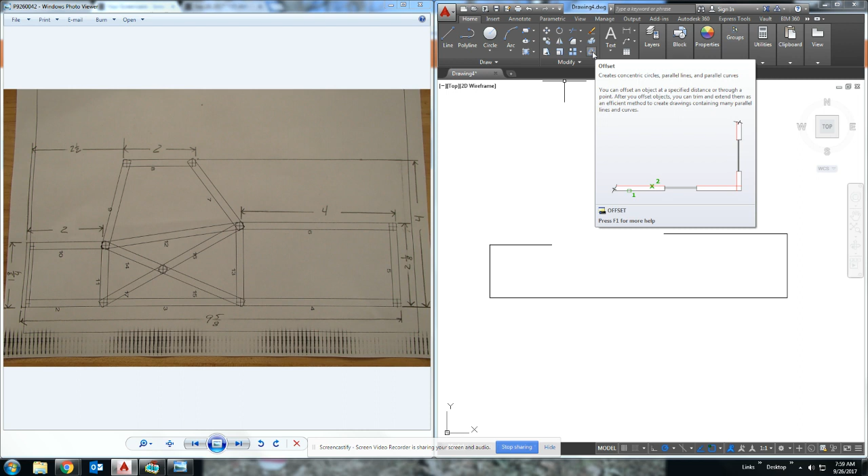The way this tool works is if you click on the button and open it up, you'll notice near my cursor in the white screen it says 'specify offset distance.' So it wants to know how far I want to offset. The first thing you do after clicking the button is type in the distance. Since my car is 4 inches tall, I'm going to type 4 and hit enter.

Now it says select object. I'm going to click my baseline and go vertically by 4 inches. So now I have the bottom of my car, and technically this is the top. Obviously this line is too long, so I'll have to trim it and clean it up in a bit, but right now it gave me the bottom and the top of my car.

So now I want to also find this point right here. I know that it's 4 inches up and 2.5 inches in. So what I can do is draw a line here, and then offset this line 2.5 inches in - offset 2.5, enter, and I can offset in.

So right now that intersection there is this point right here, which is really helpful because now all I got to do is use the line tool. I can click on this endpoint and click to that point there, and now I have just created this line right here. And this is going to start to be the top of my car.

Now, since this line doesn't exist, I just used it to help find that point. I can click on it and hit the delete key, and it'll delete.

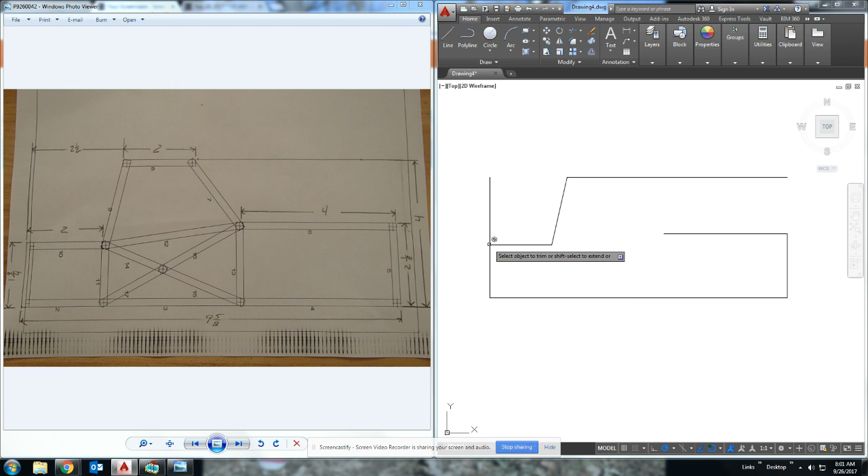I can also trim these lines. So trim tool - looking up here, I have trim. If I click on the trim tool, hit the space bar one time, then you can trim a line. Now you notice this one won't trim. The reason why it won't trim is because it goes from here to here - there's nothing to trim, it's not intersecting anything. So I'm going to hit escape, click on it, and delete. So if it won't trim using the trim tool, just delete it manually. That's the easiest thing I could tell you.

Now I know that this line, this top of my car, is only 2 inches. So I'm going to use the offset tool and go to enter and offset over. Oops, you know what, I shouldn't have deleted this one line. I'm going to put it back. So I'm going to put this line back. Okay, I'm going to offset 2 inches and go over, and this is going to be the top of my car.

All right, so now I can trim again. So trim, hit the space bar. So here's the top of my car. And I'm going to delete the lines, the unnecessary lines I don't need. So just delete them, and I can close this off. So here's the perimeter of my car.

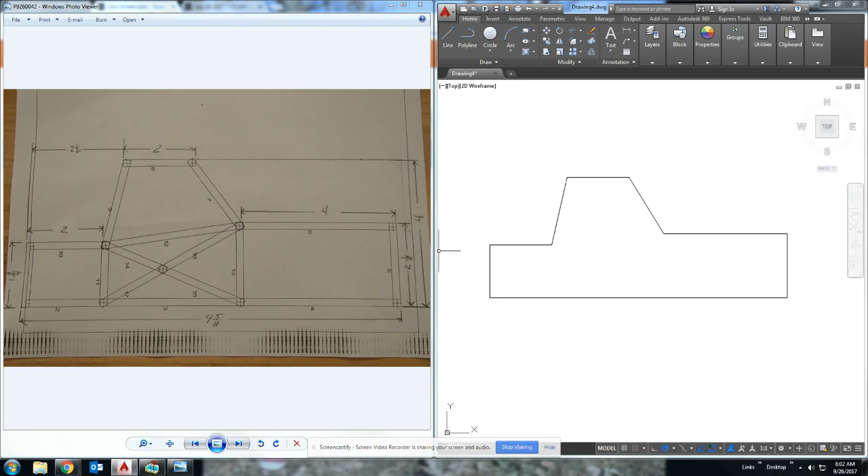Now I notice that there's a piece that goes diagonally across my crumple zone, so I can connect a line from there to there. I'm going to just keep starting to fill in the inside now. I can also see that there is a line that goes essentially straight down - that's this piece right here. I'm going to draw one here going straight down as well because that goes right there.

All right, you're starting to see a little bit of the structure now. So there's my perimeter, the general perimeter. Now notice I didn't put the diagonals in yet, and that's okay. The diagonals I'm going to have to show you - it's a little bit of a special operation.

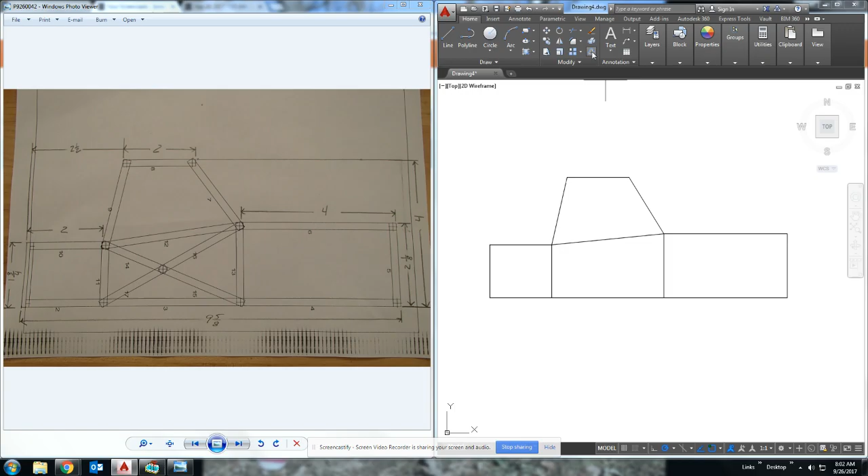So the rest of this is simply using the offset tool. We're going to offset in 3/16, because that's the size of the wood that we're using. So offset, and I can actually type 3/16 and hit enter, and it'll offset by 3/16 of an inch. So I'm going to go down, I'm going to go in, I'm going to go up, I'm going to go in.

Okay, so all the perimeters are going to be in, and you'll start to see the structure come alive right in front of your eyes. So it's really starting to look like this now, just simply using the offset tool. So all I did was click offset, typed 3/16, enter, and I started offsetting the lines in.

Now I can put the diagonals in. The diagonals go from corner to corner. So I'll draw a line like that, a line like that - this is the easiest way to do diagonals. All right, now they're going to intersect right there.

Now I'm going to offset by half the thickness. So offset by 3/32, not 3/16, 3/32 - it's half the thickness, and hit enter. I'm going to go half the thickness in each direction. That should make sense to you. Okay, so now this is 3/16 of an inch wide.

I basically have all my pieces over here; it just needs to be cleaned up. There's a lot of intersecting pieces here that I need to clean up. So this is all going to be basically using the delete key and the trim tool. The first thing I'm going to do is delete my unnecessary lines. I know that this center line is not necessary, so I'm going to delete it - that was just used to create the diagonals.

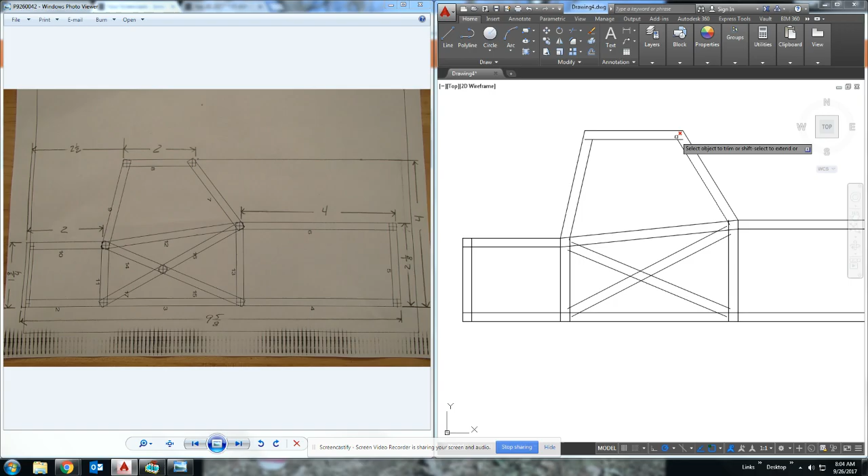And then I'm going to start using the trim tool quite extensively for my drawing. So trim, hit the space bar one time, and if it shows a red X, it can be trimmed. So I'm going to trim all the ones that allow me to have the red X. Now, a little helpful hint: always work from the outside in. So if you have multiple lines, for example here, I want to click this first. If I click this, I'm going to have to delete this later. So click this first - I'm working from the outside in, okay. Outside in.

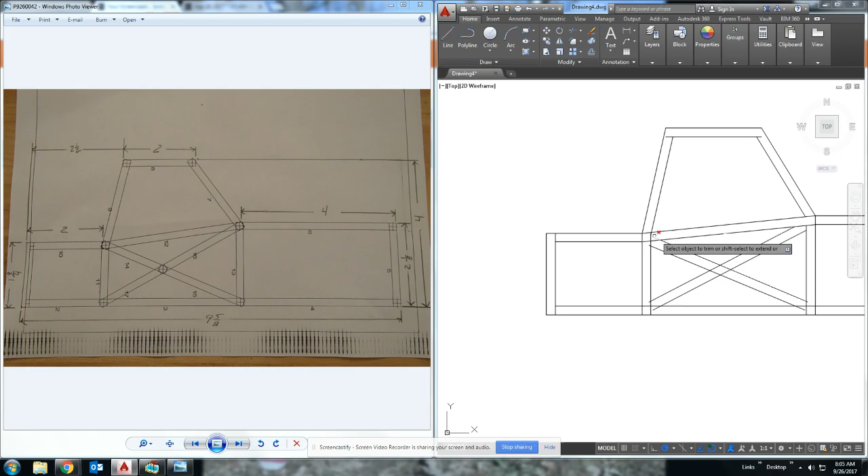Right now it's really starting to look like something that I would have glued up - those look like pieces that I would have glued up. So I'm going to again work from the outside in, and I'm going to eliminate all these extra extension lines I do not need. Just clicking all these extension lines that I do not need. All right, there's nothing down here in the bottom, so I'll delete all those. If I draw a little green box, everything inside the green box will get trimmed.

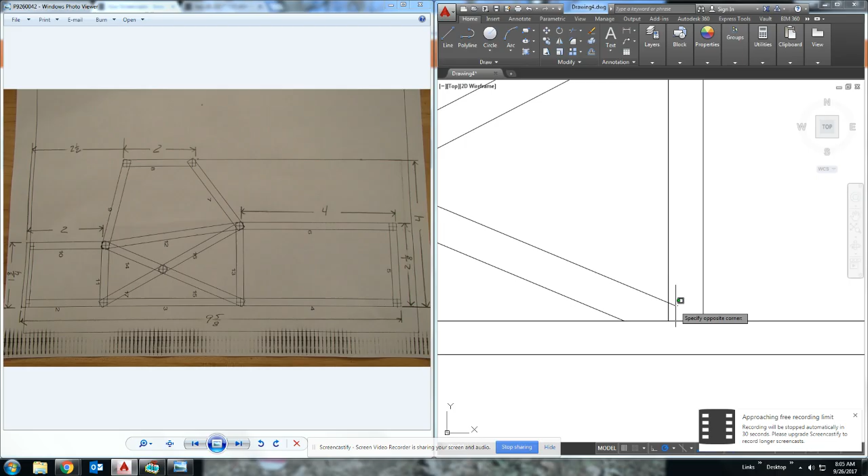All right, so basically that's what you're going to do - you're going to trim up all of the intersections, and I'm going to show you how to put dimensions in the next video.